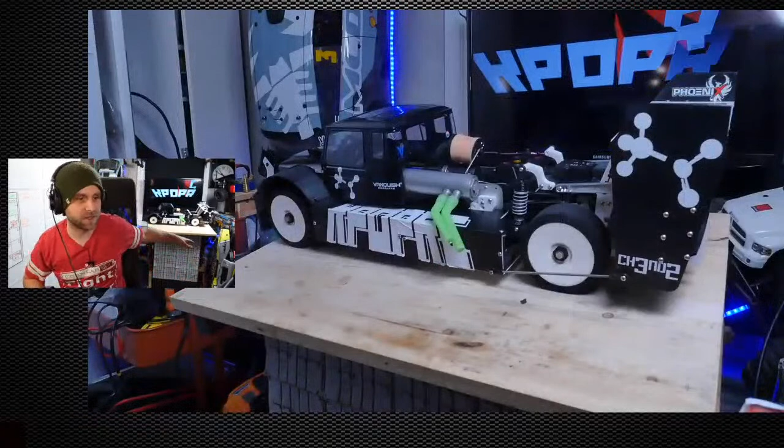We got the Mayhem build here in the background, engineless right now. It's kind of on the back burner because we got a whole bunch of snow, which kind of blows. We're kind of waiting for it to melt so we can run the Baja. The Baja, you can kind of see it right there, sitting right there, kind of awesome.

Maybe if I zoom out a little bit - oh boy, yeah you can see. Oh no, you can't see because the giant camera's in the way. Doesn't matter, we're running those hopefully this weekend. I'm not 100% sure, I'm waiting for Scale Builders Guild to let me know when is a good time.

And we're hoping that it's going to be a bit warmer. Maybe a tad lower for when you get excited. Okay yeah, and I'm gonna get excited a lot because I've got a problem with that - I had a little problem with that. Okay, we got a little lower there, okay great. A bit too low now, they're saying. Ooh okay, maybe we'll balance it out, bounce it out a little bit. I'll bring it back up, but just a hair, just a freaking hair.

Just don't yell, everyone's saying. Oh no, that means it's weirdly distorting. It shouldn't be doing that. Let me check something here - I think I can go into audio, echo, and then automatically adjust mic volume. That might make it better. I have a feeling that's going to help.

I'm using this thing called StreamYard. It's like a web portal that lets me webcam in and do stuff like this, like bring up Scott Diesel's question. What's up, Scott Diesel? Hope you're having a good Tuesday. And PSP Radar 77. I feel like that's the benefit of this software, is just so I can show people. There is a way to do this in OBS, but at least you sound better than Josh. No way, really? No way.

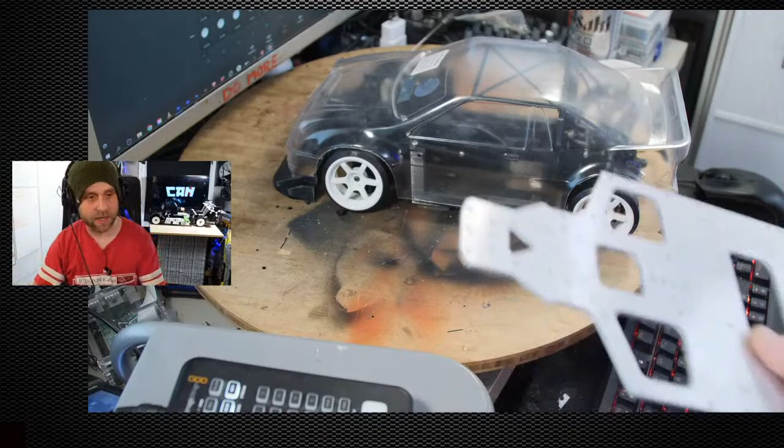Anyway, fast forward a few weeks, and I got the chassis cut out of aluminum from Send Cut Send. A massive shout out goes to Gear Guy for helping me with this file, because SketchUp sucks so hard - it sucks so hard that I couldn't get a good DXF file out of it to send. So he had to convert an STL for me, and it was kind of a big pain in the ass. But it's here.

It looks great. It's pretty much exactly the same as what's on the back here. Let's see - actually, maybe we'll go to camera 3. Yeah, there we go, now you can see. It's the exact same chassis plate, but in aluminum.

I would have cut it in carbon fiber, but believe it or not, to cut this out of carbon fiber at Send Cut Send, it's like $200 or something ridiculous. So I just thought - since I don't even know if this is exactly right, things might change - at least this only cost $28 to get cut. And if I have to make another one, it's not gonna hurt my wallet. Whereas the carbon fiber one would just be something to hang on the wall. Let's see what you dudes are saying up here.

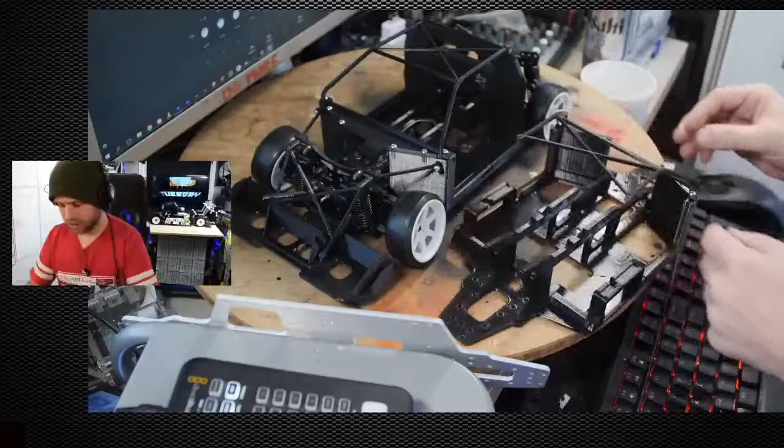I believe, yeah I did, but I kind of broke it, of course, just because I'm a dummy. I totally probably stepped on it or sat on it at some point, and I broke the cage. But that's okay, I can always print this cage again, and I will.

Actually, I'm thinking of maybe making this angle here - the A-pillar - needs to be kind of a little bit more that way. I think it needs to fill out the body, the Lexan body, a little bit better. But yeah, that's basically the gist.

I also kind of totally redesigned the firewall. So this is the firewall here, you can see it, it's pretty cool. I kind of like the texture that the Prusa textured sheet gives certain pieces of the side that's against the printing surface - gets this really awesome textured finish that looks kind of awesome, almost like a bed liner kind of look.

So I've been designing a lot of my stuff flat, so that I can print using the FDM printer. I feel like that is the biggest learning curve when you're learning new 3D printing processes - you're trying to design for the limitations of printing. So this is how I do it with FDM, but then to do it with resin, it's like a whole other thing.

Like for resin, if you're gonna print something like this, you gotta put it on the printing surface at quite a steep angle so it doesn't create suction. Man, all these weird things with resin - just the differences, I guess, between the 3D printing processes.

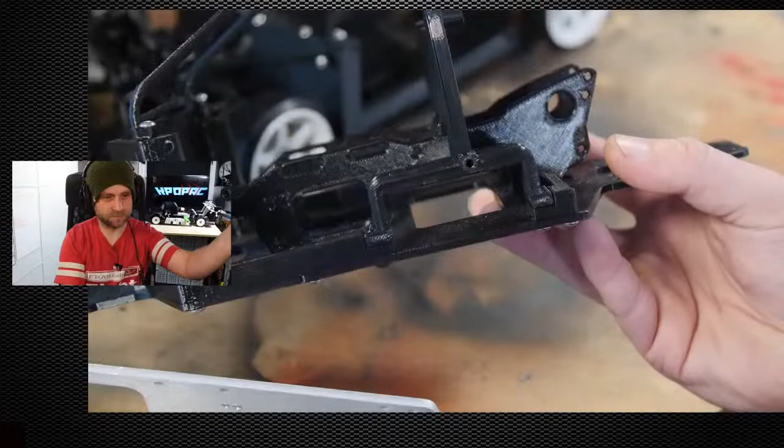So that's it, it's got a whole new battery provision. It's just a whole different way that the battery goes in. You can see I had to move the firewall super far forward, so I basically created this hole, and the hole exists on both sides.

And what's going to happen is when you slide your battery in, it's going to click - it's going to move past something that clicks. I don't know, it should be cool, we'll see what happens. I might have to redesign it, I won't be surprised if I have to redesign it.

But let's get - yeah wait, is this it? Yeah, you just need to zoom out and you need to freaking focus.

Man, more beer. All right, wicked. I'm gonna move this out of the way because we don't need it right this second. So I'm gonna get this whole cage onto this aluminum chassis - is the plan, that's the plan.

Let's do it. And of course, I'm going to use this, so we're going to hear a lot of...

It's not dead. No, it's not dead at all. I got to get rid of all of those. Look at that.

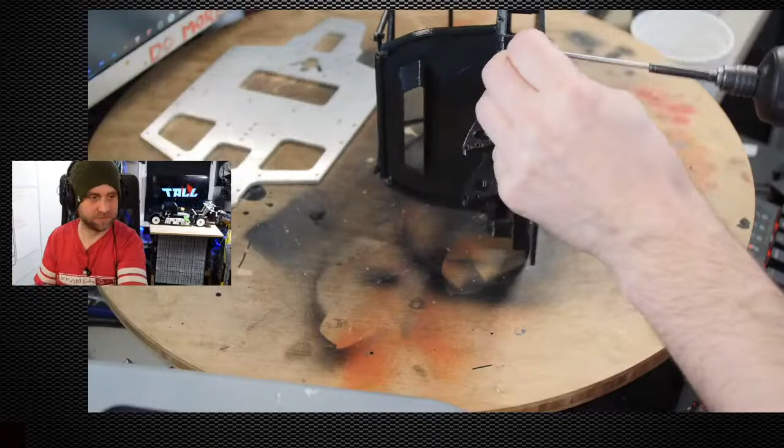Yeah, let's just zip them out. Let's just zip them out. Oh yeah, one.

This is the glamorous part of RC right here, where it just takes forever to screw stuff in, or you do it wrong and then you got to redo everything. Good Lord, it's the worst.

Anyway, I'm kind of surprised how well this turned out, to be honest. This is probably my most intense 3D design project when it comes to RC. I don't have SketchUp open. Let me open SketchUp and we will take a look.

Let's see here. 6. No, all right, okay. Share screen. No audio. Boom, share screen. Got it. All right, boom.

Let's see here. Well, I'm trying to use this awesome mouse that Paula got me for my birthday. Yeah, there we go. All right.

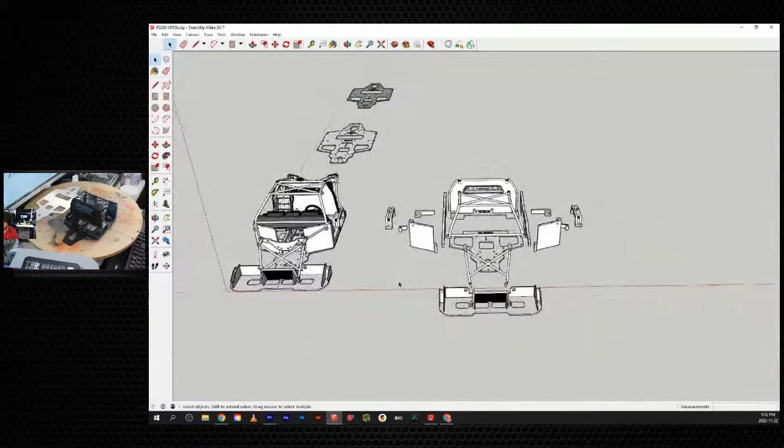It's hard because the mouse is really hard to learn, and I would kind of compare it to flying a drone, where you're in control of multiple axes, and then a rotation on one of those axes. So yeah, it's just hard to wrap your head around a control surface, one input, one hand that can move in so many different directions.

But you can kind of park it and then just do these long, slow pans. Anyway, whatever, I'm getting ahead of myself. This is it in 3D here.

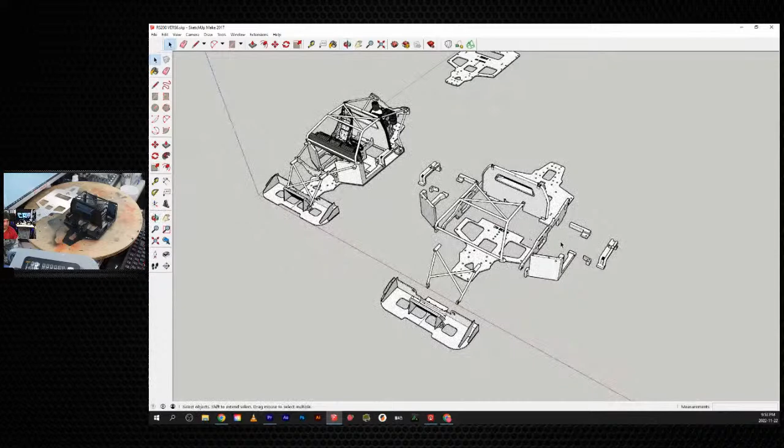So these are all the parts that I'm basically taking off the plastic chassis right now, because I no longer have to have this in 2 parts since I have the aluminum one all ready to go. So let's hope this all fits, because it's going to be really damn embarrassing if this doesn't fit the aluminum plate.

If it doesn't fit, I'm just going to hang it on my wall, I think. Is what's going to happen. Yeah, I know, totally, right?

Hope that battery's charged. Which battery? What are you guys talking about? Let me drink some more beer. Oh, delicious beer. Okay, let's keep going.

Let's keep going. I just got to pull out all these screws, basically, is what I got to do. And you can't see anything. You know what I'm saying?

All right, okay, we're doing it. We're doing it. There's, okay, so yeah, there's the cage, the top cage piece.

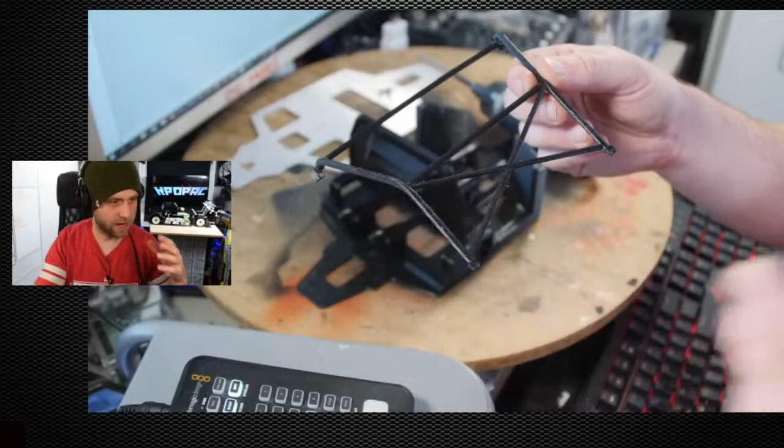I learned a lot from the Hilux build. If you guys don't know what I'm talking about, we made a Hilux, fully tubed Hilux drift chassis. Scale Addiction and I did. And when we designed the whole cage, we didn't think really about the printing and how much support material would be needed to print the cages. So, oh, maybe I can show you dudes.

Yeah, all my camping gear is in here though. Yeah, okay, perfect. This is great. I can show you dudes.

So we designed a cage, a Hilux cage. It's a replica of the Engineered to Slide Drift Hilux from Australia. It's like the sickest Hilux. It's slammed, completely tubed, basically just a thin sheet metal body on top of a full cage.

Anyway, when I print those cages, because I was printing them and doing raffles, this is how I would print them. So this is the center section, 2 center sections of the cage. And you can see they are just full of support structure. This is all garbage, all wasted materials.

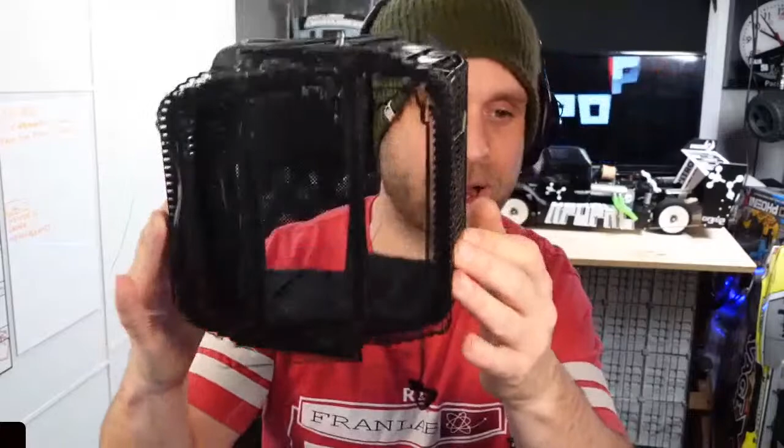Also when you do this, it ends up taking an incredible amount of time to print, and the failure rate is high. All of a sudden you get a weird draft in your room, or you open the window, whatever happens, something's going to happen. Some weirdness is going to happen and you're going to fail a print. Then this 14-hour-long print becomes totally garbage, right?

You can see, as you can tell, I have 2 Hilux cages all ready and printed. Not ready, but ready to be... what is this called?

Supports are a huge pain to remove with PETG because it's quite a strong piece of plastic. So now I'm designing the cage in parts, so it prints flatter and I can put the support structures on the inside where people won't see them as much. Mind the broken part here, I must have stepped on it. Doesn't matter, I'll reprint this anyway since I'm changing the structure.

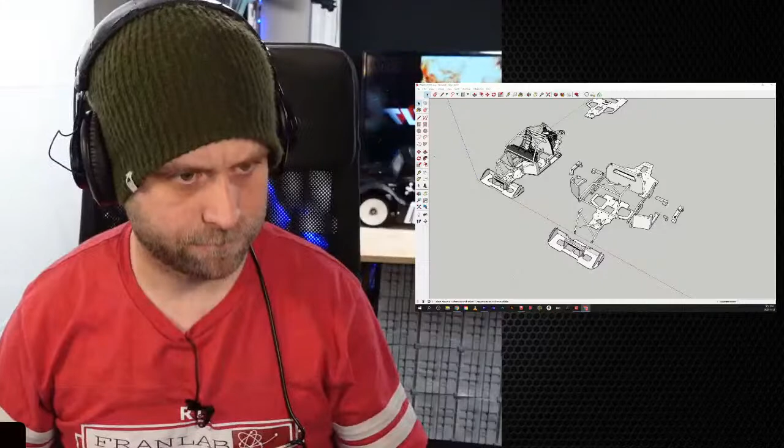So you can see I'm trying to separate the cage into all these little chunks. We've got the one you just saw, the main hoop which is another part, and then the back sections as well. These back sections will actually have a cross section on them, like cross pipes. Everything's going to be printed quickly and hopefully with less support structure, that's what I'm trying to get at.

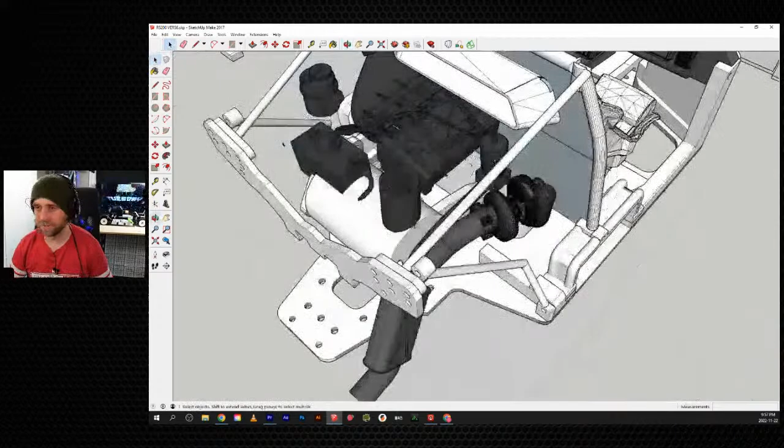You can see the 4-banger right there with the giant turbo, the exhaust I made. I didn't go too crazy, I kind of thought of making it like a super late 80s race car, like pure race car. I love this exhaust man, this exhaust is pure fire.

What are you dudes saying? Everyone's telling me to drink. What's up Goat, hope you're having a good Tuesday. Nash, no, I got an extra battery though. Everyone's telling me to drink more beers. Damn, it's because you get me focused and I start getting all boring. It does look awesome though, I'm totally into it. What's up MK6, hope you're having a good Tuesday.

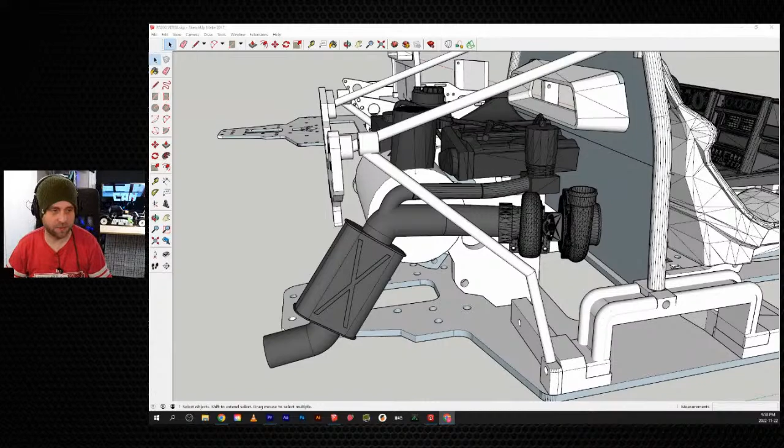We're just talking about the RS200 project, and I'm trying to actually get things done on this episode of Tall Can Tuesday. Not only just crush beers, but I'm trying to basically -- alright, let's focus so you guys can see what I'm doing here.

Maybe I shouldn't have done it in black. Next time I do something like this, I'm going to print it out of white because the black makes it kind of hard to see anything. I'm going to need that in a second, I put it down on the ground over there. Alright, let's keep going.

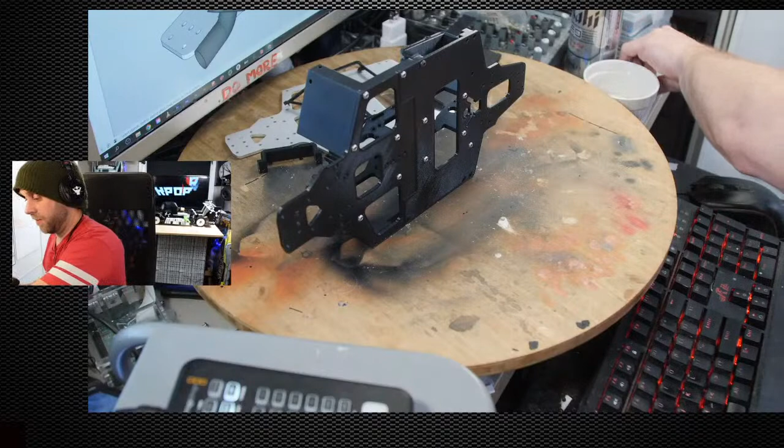I didn't even get it, I don't think you guys can see what I'm doing because my hand's in the way. Here, now you can see. So many screws, this is what happens when you're not an engineer, or maybe just starting out as an engineer where you over-engineer everything to the point where the screws in this kit are going to be heavier than a lot of the other components. The screws alone are going to be quite a lot of grams, I bet.

This is what it's going to be, it's going to be tons of this. Alright, we got parts, parts are flying off.

I should have got a guest, what was I thinking? We could have been chatting. Nash, you want to pop on?

So many screws. Wait, we could do this, and zoom in a bit. There we go. Is this camera still dark? I can't even tell anymore.

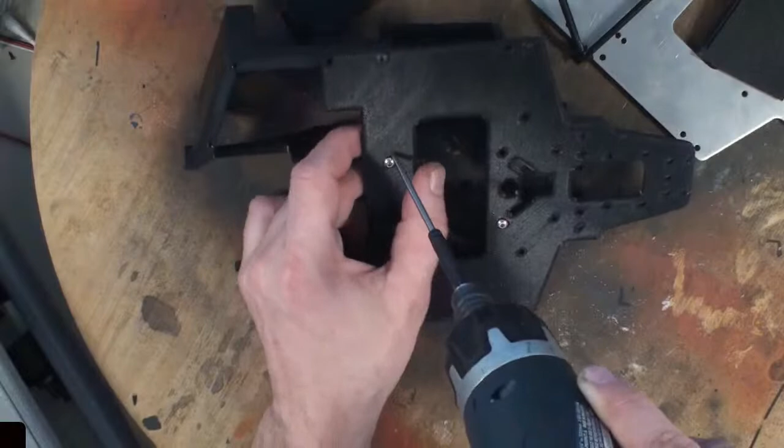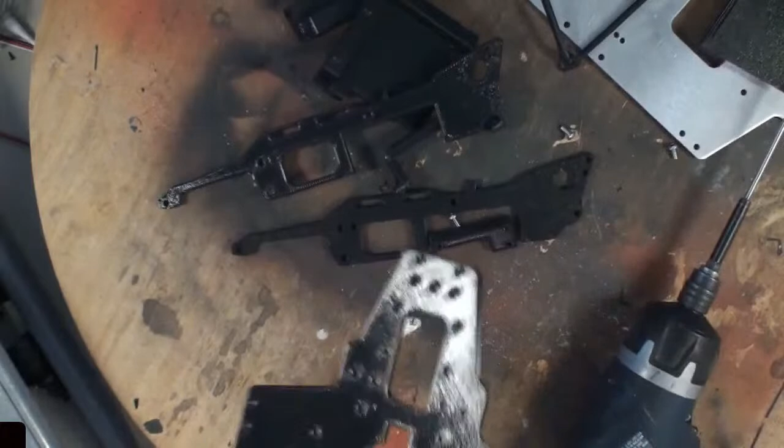I feel like if I had three more beers I wouldn't be able to do any of this, so maybe it's good we started early, you know what I mean? Started early.

Alright, I'm going to move all this stuff off. Alright, boom, alright.

Is it bad I can't talk and occupy my brain with other things at the same time? Is that a learning disability? I don't know, God, maybe. Let's see here, oh, it's already past Nash's bedtime. Damn it. Alright, Dean, what's up buddy. I know, Boo? Wait what? Oh, Boo is like Nash's bedtime, got you.

Alright, so we got this awesome, beautiful water jet cut piece of aluminum from SendCutSend. It is a little bit thicker than most RC plastic reinforced materials, like the stuff you'd get for cheap RC cars like the Sakura.

It's a lot thinner than this. This is quite a thick piece of aluminum, and it is quite weighty. It doesn't weigh nothing, that's for sure. It definitely feels like it's got some weight to it.

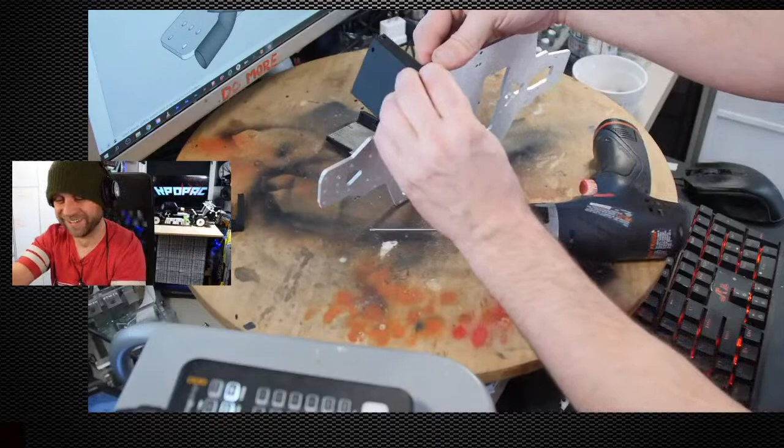For sure, let's do this. I feel like from above it's easier to see what I'm doing.

You know, I'll tell you what, I really like PETG. I like PETG because when you screw into it, especially with a tool like this, it actually heats the screw up quite a bit. And if you end up going past and stripping out the screw, the heat will actually melt the plastic enough where once it cools, it will still create the thread. So believe it or not, if you get this thing hot enough, you can remake the threads in the material, which is kind of awesome.

Ask me how I know that. It's happened a lot. I've been screwing a lot of 3D printed pieces together lately, and I haven't been using any inserts. You can get these copper inserts, and some guys actually pause the 3D print and insert brass threaded inserts into the print as it's printing. Then it prints the layers on top, and seats them into the plastic. I mean, that might be kind of a mistake with RC if you're taking screws in and out - you might end up stripping the brass insert inside the 3D print and it would just spin, and that could be a nightmare. I could see that being a nightmare, but it's super cool that people are doing that.

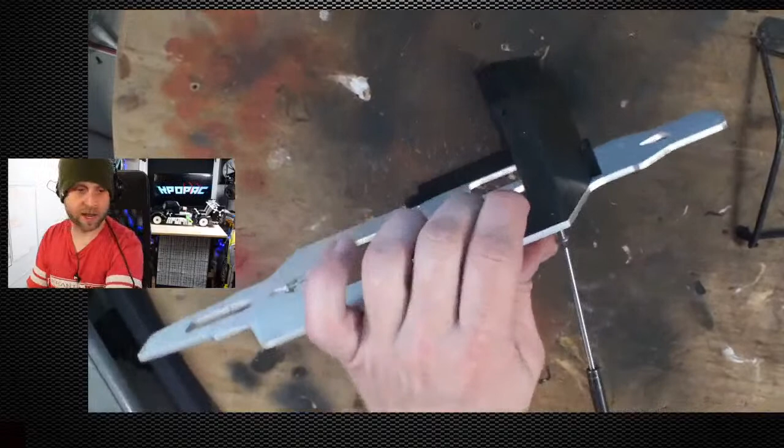I know you guys do similar things and make your own cool RC stuff, even if it's not 3D printed. It doesn't have to be. I feel like that's why I got into RC, to be a mini engineer, to make things and figure out, learn from doing as well. Not like an RTR guy, I'm not the kind of guy that would buy an RTR. Let me know in the comments how many of you dudes have owned RTRs. I think I've had maybe 4 RTRs, and all the other ones were kits. I prefer kits, I feel like you learn a lot about the model when you build it. Whether that's making a ton of mistakes while you build it, that's a possibility too. But I'm thinking more like, once you put it together and break it, you can at least put it back together with new fresh parts, and you'll know what you're doing.

Anyway, oh, that's actually kind of badass, check this out. All right man, this camera's kind of foggy, I don't know why. I feel like maybe the exposure's a bit crunchy.

Oh, let's see here. Steve-O, what's up buddy? Hope you're having a good Tuesday, man. It's telling me to drink some beer, so I will. Oh, that delicious beer.

I build one-of-a-kind drones, yeah you do man. Dude, let me know, I want to get into it. I really want to learn how to properly pilot racing drones, not like a DJI stabilized camera drone. You're actually going to crash the thing if you don't wobble it into place, if that makes any sense. I do have a couple of digital versions, like I know that Mr. Steele has this one app that he swears by, and he has a couple of videos on how to set it up to make it feel more like the real world. It's like a digital version of FPV flying. I think I'm going to keep playing with that until I feel really comfortable before I go into real world FPV drone stuff.

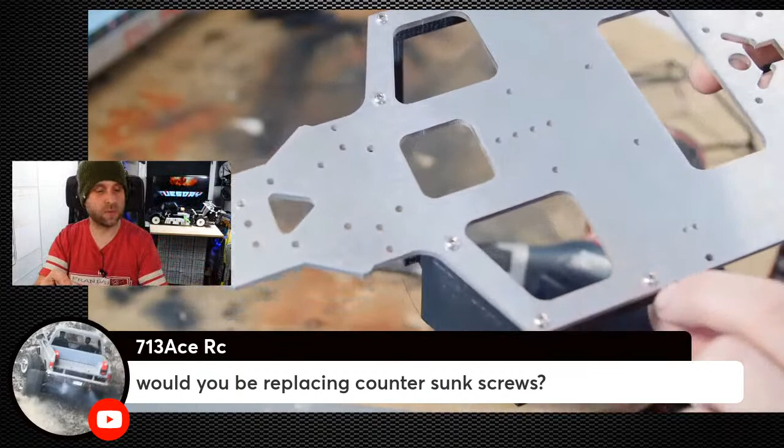Would you be replacing countersunk screws? No, I don't know, I mean, yeah for this project probably not. 713Ace Rc, I think we're just gonna use button screws. Is that weird of me to do that? I don't know, the thing is at the time they wouldn't do the countersinking. When I ordered this, they didn't offer countersinking yet, but I know they do now, so maybe that would actually be really awesome to do countersunk. I'm just trying to keep up, I feel like it's gonna be like this. Unfortunately we're not gonna have the countersunk screws on this particular model, but that's okay. You know what you could do, you could get titanium screws and slam it, and it'll just spark. I don't know, that'd be pretty cool. All right, let's keep moving.

We got more stuff to screw in here, let's start with these. So these are the new chassis, horizontal chassis braces, I guess the vertical stabilizing chassis braces, and those long screw holes there, that's just so I can slide the seats forward and back so you can plug the battery in, because the battery slides into this hole here, and then you've got these two banana leads, 5 mil banana plugs. So you got to move the seat out of the way in order to. Wait, I guess I can show you in 3D. So here you can see, this seat will actually be able to move forward, so that's where it would sit.

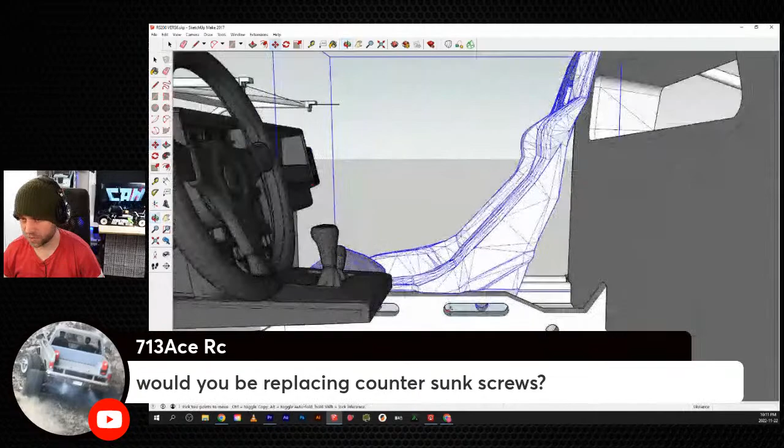Oh wait, maybe not, because you can see it's right into the firewall. So that's good to know that we can't have it. I should probably make these holes smaller because the firewall is going to stop the seat from going any further back. Maybe we should figure that out.

This whole back end got changed, and of course I didn't fix the seat rails. That's okay, I'll make that happen on the next revision. The next revision, damn, so many revisions. But yeah, super cool, this thing's cool.

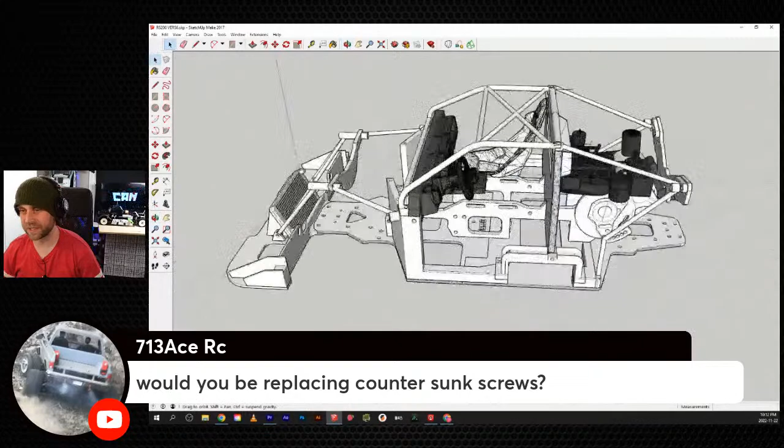Check it out, I can put the cage back right on this corner. Boom, there we go. Yeah, I think it's going to be probably the best looking scale drift project that I've ever completed.

So I'm looking forward to it. And to be honest, I'm looking for more bodies, but it's hard to find these ones because I want to buy like 4 more of these bodies. This particular one is made by a company called Archon, and I think I originally bought it from Amazon, and the seller doesn't have any more. Now I'm just looking for more with the perfect wheelbase. I already bought one that ended up being true 10 scale, so that sucks. Now I have a 10 scale version of this that I don't know what I'm gonna do with, but I guess it'll just go into the collection of Lexan bodies that I'd never paint. Jeez, I have a lot of those.

What's going down? Anyway, how awesome is that? Super, super cool.

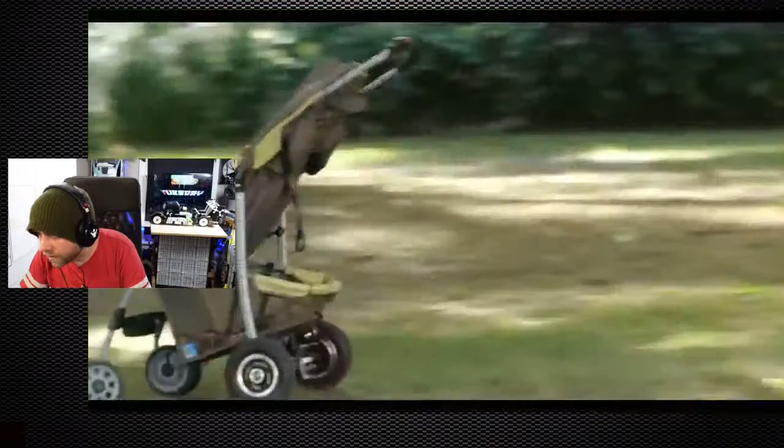Wait, haha, all right, let's see if this, hopefully it's not too loud. This might be too loud, I'm going to turn it down a lot. That's me decided. Ooh, I can't even hear it, it's so quiet, for me, not for you guys.

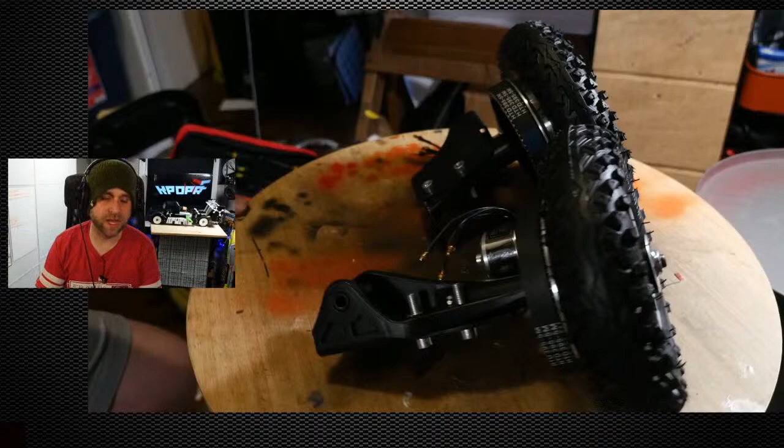Into insanity, the stroller. I'm just going to turn it down so you can just hear me. We took these skateboard wheels, skateboard trucks built for super low kV, high voltage motors, and I modified the motor bracket to take an outrunner motor. We've gone through one set of outrunners already. The first set was 780 kV, which was still too high because our gear reduction on those motors was 5-to-1 - the motor would turn 5 rotations and the wheel would turn 1. So with the wheels being that large, it needed quite a bit of torque to get going.

So we ended up replacing the outrunners with 320 kV motors, and those freaking motors, that thing will start and go, no problem. Let's see here, let's get to the good stuff.

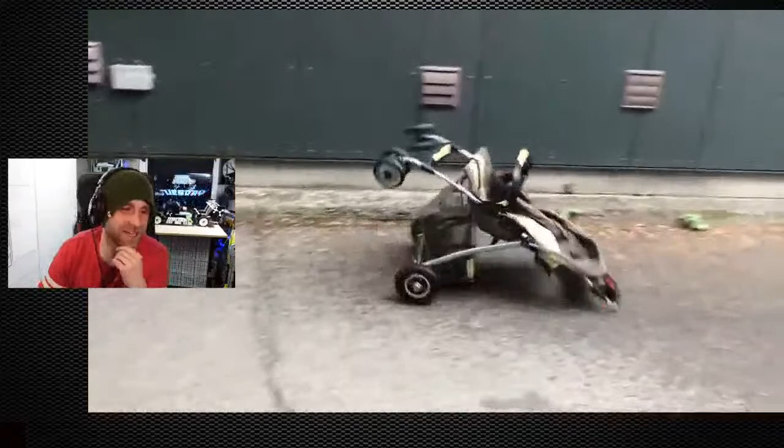Oh yeah, this is the maiden run with Nash. Nash and I got together to shoot this thing, and this is the first time we ran it. We realized very quickly that any kind of power on the wheels is going to tip this thing over. It's meant to fit in the trunk of a car, so it folds, there's a folding point, and that creates this awful center of gravity.

So of course I went and got a brick, and we zip tied a brick to the front of this thing, and it was really funny. Maybe we can hear what we're talking about, because this is the funniest part of this whole time.

Oh man, sweet, all right, so I got zip ties. Should I go get a brick? Oh, I thought they were heavier. They're not heavy bricks, man. Maybe we zip tie the batteries to the front, and then zip tie the brick. Oh, look, it's not that heavy, eh? That way it looks like a brick. Maybe we should have done it underneath. Oh, like underneath, oh no, you're right, under.

So these are the super high kV motors. That's more controllable, eh?

Stop. Okay, it's working. Oh wait, hold on. Let me pause this for a second.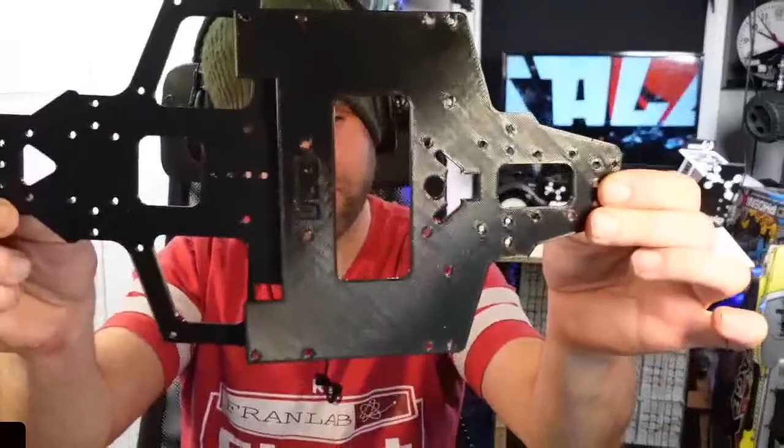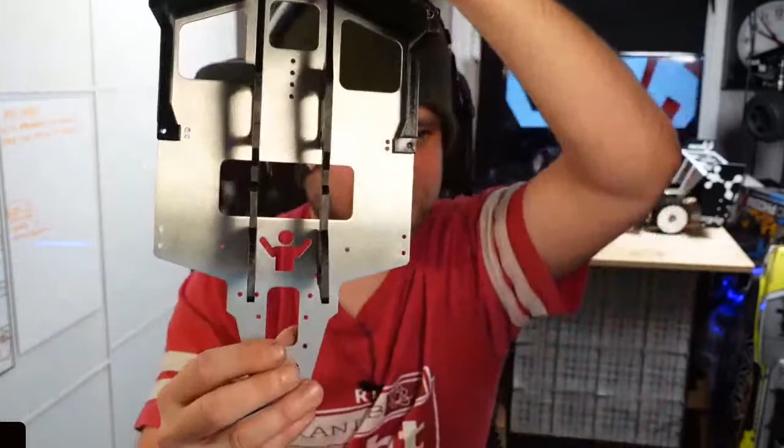I didn't really make it, it's piggybacking off of another chassis. But what's cool is that the whole chassis couldn't fit on the printing surface, so I had to split it into two pieces. The design of all the pieces kind of fit together and support the fact that this is two pieces. So really I should redesign everything to not have to be split. The reason these are split, or the reason there's extra screws here, this one and that one, is because there used to be a giant crack - this used to be 2 parts. Also, it's kind of cool, I put my logo there. That's pretty fire. Damn, so highly recommend sending stuff out to Send Cut Send and getting stuff made out of straight up aluminum. The coolest, man.

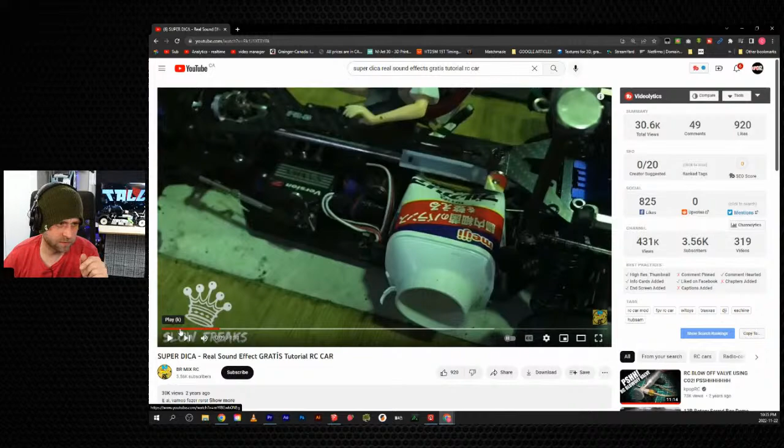Yeah, see, that's the sound, man. That's the freaking sound, and look what it is - it's like a yogurt container. And then what he did was he machined a square kind of collar that slips over his solid rear wheel axle. You can see there, looks like a front engine design chassis. I'm not sure what chassis it is, I don't know that, I'm not an encyclopedia on it by any means.

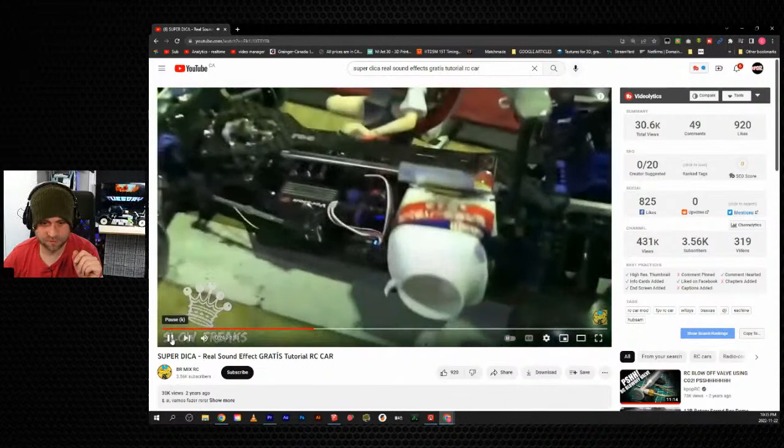Yeah, if you guys haven't seen this, man, wow. I like how he's with the throttle, making it sound like that, and you know he's doing that with his finger.

Anyway, it's super sick. Massive props goes out to these guys for making that.

It's pretty sweet. Jipper, man, what's up buddy? Hope you're having a wicked Tuesday.

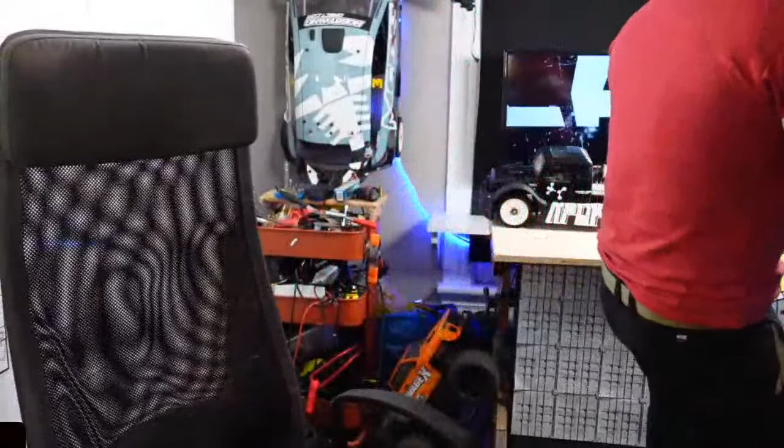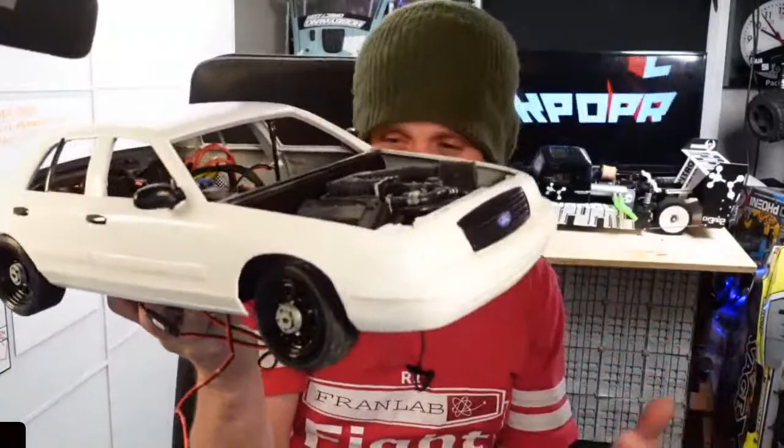Oh, I don't want to break them though. Could you imagine if you broke them? I have this nightmare that I'm just gonna one day break this thing before I can finish it, and then I'm gonna cry because it's the coolest thing, it's another one of the coolest things I've built on the channel. If you guys haven't been watching along, there's like a 10-part series on building this Neighbor.

Yeah, drift, I would call it a drift car, but it's more of a burnout car. The reason it's a burnout car, check it out: you can pop off the back, slip out the front. There you go, and now we've just got the chassis.

You can see here, this is the largest BEC that Castle Creations offers, a 10 amp Castle Creations BEC. The reason I need one is because there are 4 servos. You can kind of see there's one servo, there's the other servo, and then on the back there are 2 more servos, and that controls a super scale 2020 active suspension kit.

And what that does is it creates this very swimmy... haha, why not show you dudes, because this is the coolest. Just let it calibrate for a second. I'm gonna pick it up so you can see the wheels dance around, and then we'll put it down on the Lazy Susan over here and check it out. Oh, it's working, I can hear it. Hold on.

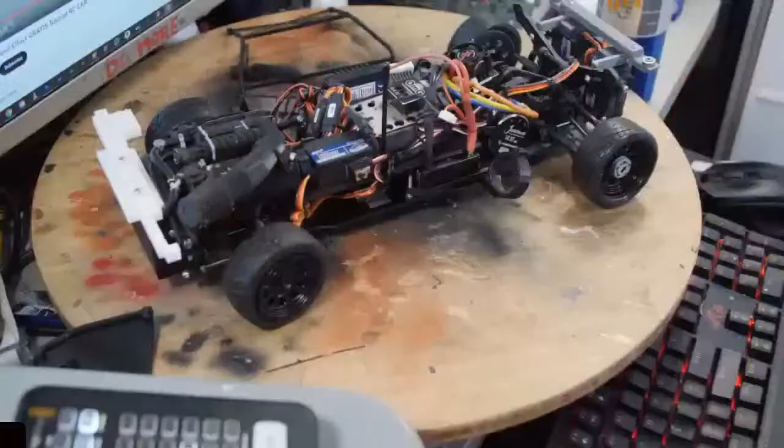Anyway, it's sick. So what was I talking about? I was talking about how it's a D4 chassis, so it used to be 4-wheel drive, but what I did with the front diff was I created a line lock. So this servo on top actually stops the front wheels from spinning. If we were to turn this servo back a little bit, we can actually lock the wheels. And it's hard to do with your fingers, so maybe I'll just leave it for now.

Make it dance, Jibbersane. Yeah, I know, Scott Diesel, I watched the video. Scott Diesel is saying Cleetus wrecked it again. Yeah, I totally saw that. Man, I wonder if it's long for this world.

I'm definitely gonna make it, because I should, with the back bumper. Hey, I wonder, do you think—I don't want to lean on freaking Cleetus McFarland by any means, but it would be cool to sell this bumper, even if it's just like an ornament you hang on your rear view mirror or something. That would be a really obscure Cleetus fan memorabilia thing, I think. No, that would be really cool.

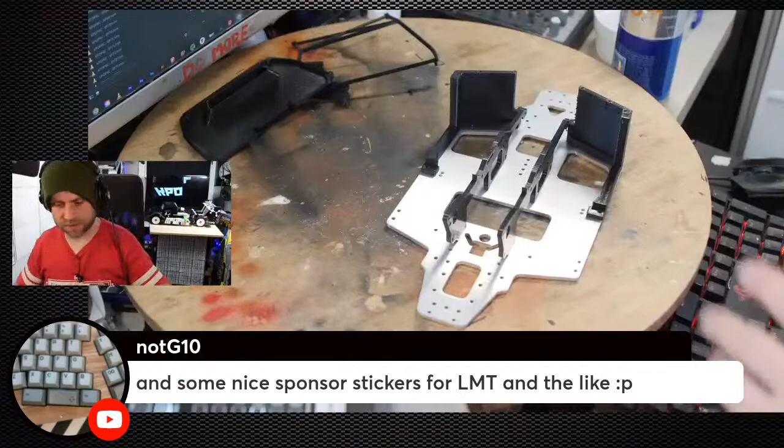That sounds cool. All right, let's keep moving on this thing, because I feel like I'm going to lose all the parts, that's what's going to happen. Let's see here, we got, oh yeah, okay. So I can't remember, oh yeah, okay, so these go like this and like this.

See, I wonder if I could have. The reason I made these into 3 parts is because I didn't want to. The trick with FDM printing is to design everything so you don't have to use supports. So if you were to look at this particular part right here...

I printed it like this so that I didn't have to use any supports. Although that was kind of a dumb move, because if you look - oh God, get back in the camera - I printed it like that. I probably should have printed it like this. I think I designed it to print like that, but I was a dummy and must have put it in the wrong orientation on my slicing software.

But yeah, so that was the whole point, was to design all this stuff so that you had no supports. The supports are the devil. They work, but because it's such a thin extrusion, and it's one line extrusion most of the time, what ends up happening is you get weird little blobs of plastic on your print head. Those blobs become fairly large over time, and then get left there, and the next time the print head comes over it runs over it and you get a hop - this weird hop over it - and it can do weird things. It can sometimes pull the whole support or rib off, or it can just split it. It can just do really, really random stuff. So if you can avoid using supports, definitely avoid supports for sure.

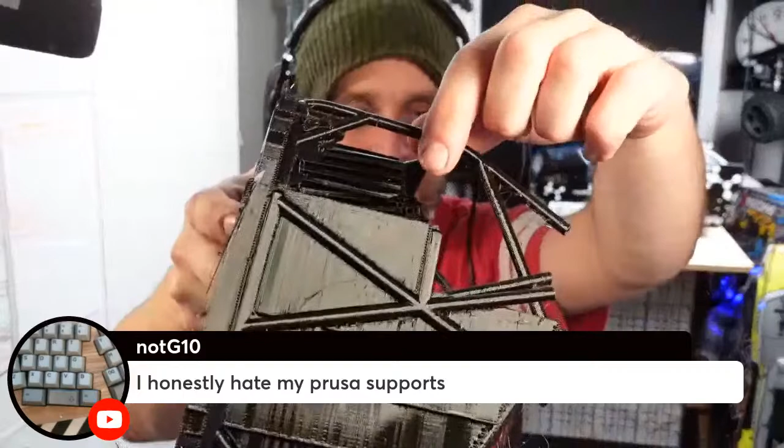You know how crappy this is. I guess it's not that bad. I guess it's not that bad. Oh yeah, it is, it's that bad. Check it out, look. Well, there you go, that's a waste. Massive waste. Support structures. Well, that's too bad.

What can you do? It's happened before. It's gonna happen again, for sure. I think so. Yeah, wait, hold on - what were you saying? Whatever happened to the RB?

Oh okay, so Space Panda - there's some weird stuff with the RWB. The problem with the RWB is that it's like a promotional thing for Cardinal Racing, and it's supposed to promote the chassis it's based on, the Yankee chassis. The problem is he doesn't have a lot of those chassis, so right now it's a little bit on the back burner until either Cardinal gets more chassis to sell, which might happen.

Yeah, or we just go rogue and just hit it. I have the engine for it, it's kind of ready to go, and it is build season, so I'm thinking we should probably get back to RWB. I should probably find somebody who is better at painting than me to do the Porsche livery on there.

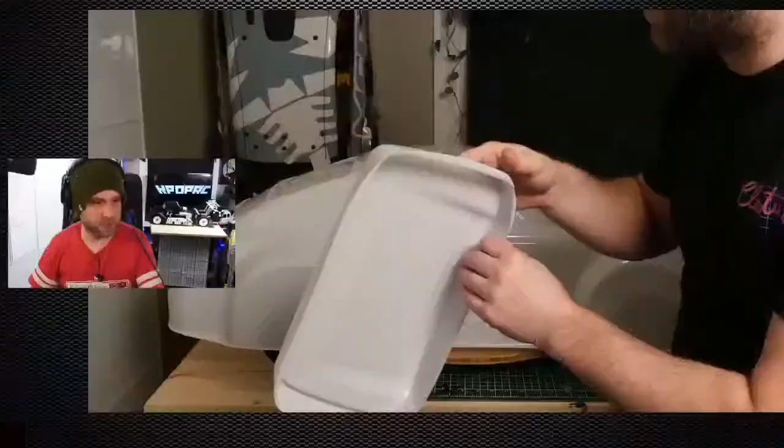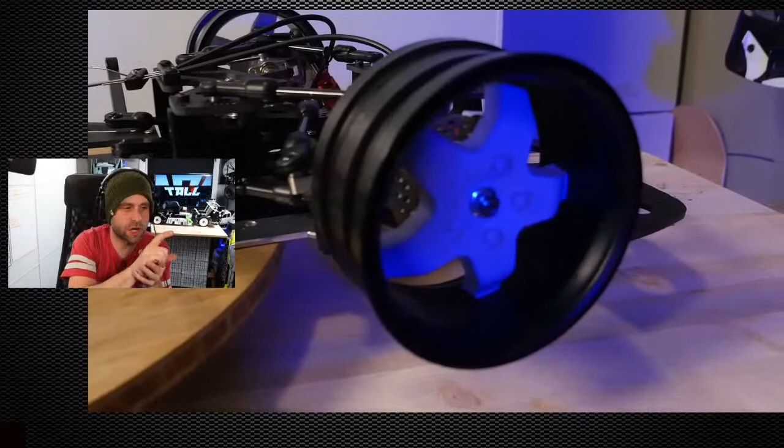Anyway, I was going to show you guys the Porsche, because the size of this thing is pretty nutty. I was looking at cool Porsches. Anyway, this is the chassis here, so this is what this would be going into. It was hard to lift, I thought it was going to be as heavy as a tall can, but it's heavier, like a pan chassis. It's a very classical pan chassis design, using basically leaf springs in the front. It does have a shock that dampens, but it doesn't have a spring on the front, it's using some kind of leaf spring system in the front. Those are FG front disc brakes. We're going to line lock the front so that on 12S we can do a pretty nice healthy burnout, I think that would be really cool. Look at this thing, it's freaking crazy, it looks so cool.

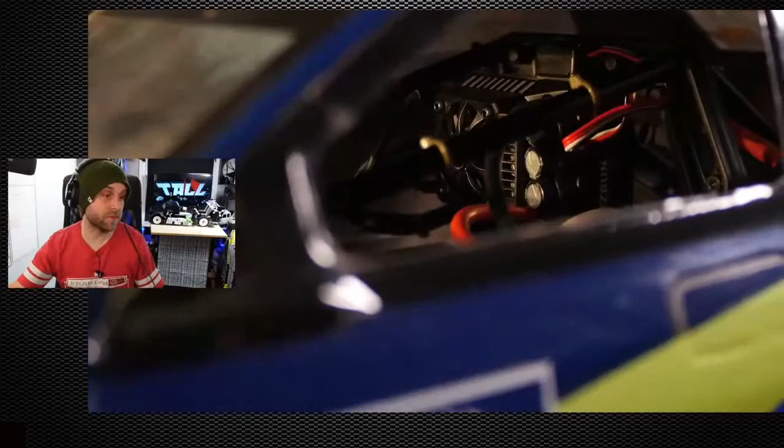Anyway, so Yankee, this is the company that makes it. Visit Cardinal Racing, if you visit cardinalracing.com you can email him and ask if these guys are coming. He's the owner of this vintage MCD bug-eye Subaru that everybody always asks about. Whenever somebody sees this in my videos, they're always like, where can I buy this fifth scale car? And you can't, man. This thing was last produced in maybe 1999, maybe 2000. Apparently they lost the molds, I don't know if that's a rumor, but they lost the molds, and I don't think they were licensed molds to begin with, so maybe that was like a cease and desist thing. Not 100% sure. I wonder how many car companies send cease and desists to companies that make replica models of their cars.

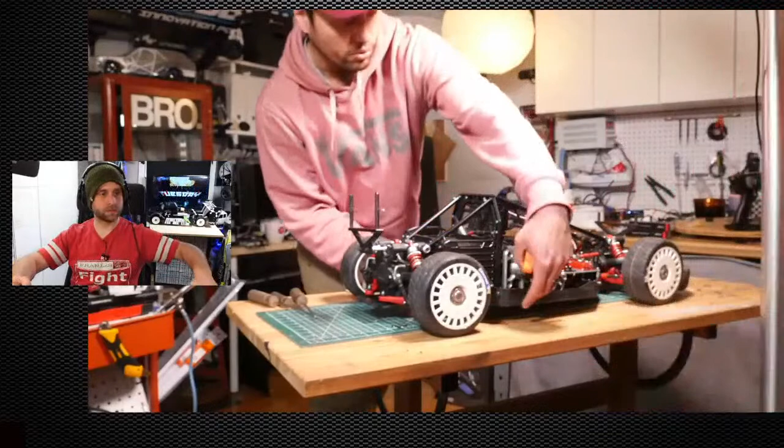Yeah, here you go, here's the episode. It is 100% the most perfectly proportioned, just Lexan bug eye body ever. And the reason I say that is because the coolest thing about the bug eyes and that generation of cars is that when you're driving, you can put your arm on the door sill when you open the window, and you don't have to do this like with the new cars—it's comfortable. It's the same thing with E30s. E30s I feel like are lower, side impact ratings terrible, but for driving experience, there's something about putting your arm on the door, you know, and that's how you can tell.

The HPI, I mean I love HPI, don't get me wrong, but HPI's Nitro and electric, the WR8 or whatever version of this bug eye, proportions are all incorrect. They basically stretched that Lexan body until it fit the wheelbase of the car, not the other way around, which obviously is, to me, no bueno, man. That's why Kyosho is so good—if you buy any Kyosho 8-scale Nitro or touring car, they're like the most perfectly proportioned RC cars ever made. Man, good Lord.

Yeah, but sick, eh? Yeah. Team Associated. All right, let's give that a Google real quick.

Associated RC. Ah, okay, got it, I'm looking for the cars though. News, I guess it would be on news. Oh, are you talking about the unicorn reflex? Oh no, I found it, yeah I did see it. Weird, okay hold on, we're gonna turn off my Premiere for a second. Oh my God, I didn't do it. No, I did it, then we're gonna share screen. Check it out, okay so this is it here. Oh man, my bookmarks, that's annoying. Okay, oh what have I done? Let me just quickly remove my bookmarks. You don't have to see that I invest in stocks and stuff, terribly, but whatever, we're good, we're working it out, learning. Anyway, this is the new—

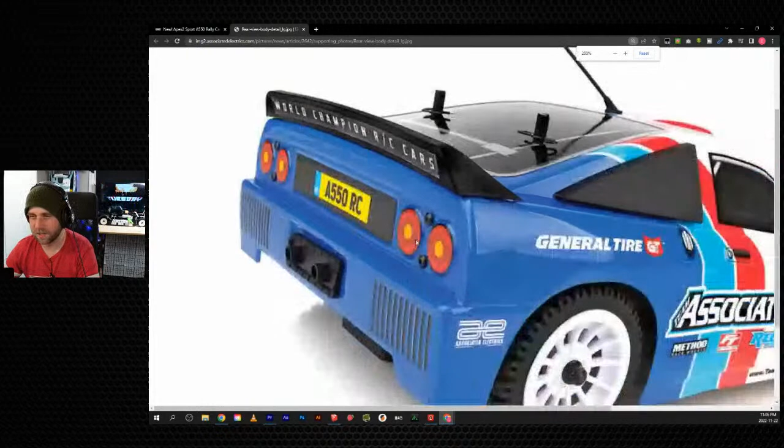Associated apparently came out with a new kind of rally Group B inspired car. It doesn't look like they got a license for any of the real brands though, that's too bad guys. What the hell is that supposed to be? Open image in a new tab—is it a big image? Oh yeah, okay, that's pretty good. I mean, I guess they're trying to make it look kind of like an Audi, a little bit, I guess. Man, I feel like I got my finger on the pulse—I've been buying Group B rally 10-scale bodies for the last like 6 months.

I've been looking—ooh, these rims are sick though, and the tires are sick too. Yeah look at those, that's pretty sick. I mean it looks cool, it has that Lancia vibe for sure, right? Got the Lancia vibe. Would you be able to do—let's see here, yeah.

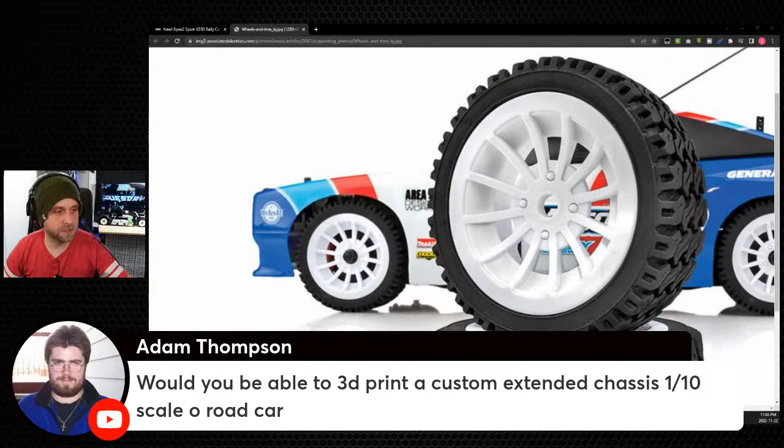No, Adam, I wouldn't be able to do that. My recommendation to you though, Adam, is to just go to Creality.com, pick yourself up a 3D printer for under $200, $230 US dollars or whatever, and start your road to learning how to make cool stuff. That way, what you would have to pay me to do it—which I wouldn't do anyway, because I just don't do that. But you know what you could do if you don't want to do all that stuff: you can join a bunch of 3D printing Facebook groups, and there you can ask people to do stuff for you, and they'll give you a quote and you pay them. But just a heads up, you might end up paying close to the cost of a 3D printer, because 3D printers are fairly cheap nowadays.

Right? Alpine 50, okay got you. Alpina, okay yeah, I see what you're saying. Yeah.

Oh yeah, the Jipper, I don't know. Let's build one and they will come, right? Maybe that's something I should talk to Scale Builders Guild about. Maybe we should be starting more community involvement. I know it's local, but we're pretty close to Niagara Falls, so maybe we can do something close to Niagara Falls so people can come up from Buffalo, New York, or move around a little. We're also kind of close to Lake Erie, which is fairly close to Ohio-ish. Pennsylvania's right there, Ohio and New York State. I'm just north of that basically.

Let's see here, I use Kyosho Fazer MK2.

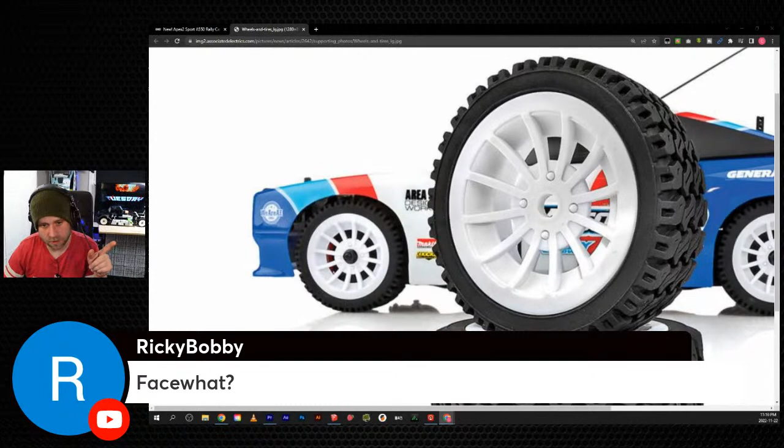What do I do with my hands? Yeah, you don't have to use Facebook. You can jump back 10 years and go to forums. There's forums online, you can join a 3D printing forum, you can actually jump on the Prusa forums as well. There's a whole community there that's just related to 3D printing. You don't have to use Crackbook or whatever. Yeah, no, I'm with you Ricky Bobby, don't. And if you're on Facebook, don't use it on your phone, only use it on your computer. And if you use Chrome, which some people don't even use, there's a Chrome plugin called Facebook Purity, and what it'll do is cut some bullshit out of there. So that's what I do, I try to consume Facebook only on PC and use a plugin that fixes the feed for me. So there's ways around it, but it's still awful, so don't do it.

What tire, gear guy? It's gonna be the tires that my drift track uses, so I can't remember what they are. They're Yokomos, I can't remember the name of them. Gear guy, they're the ones, every time I go to the drift track I'll usually just buy a set. I gotta actually go back to the drift track.

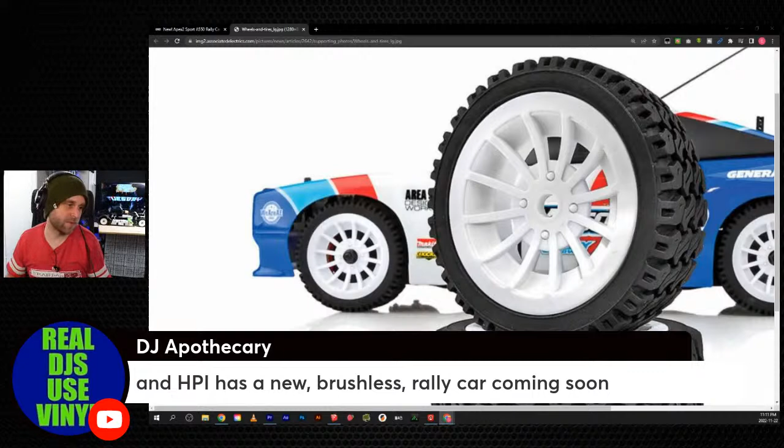And HPI has a new brushless rally car coming soon. Yeah, I should bug them about that, actually, maybe I'll bug them about that. I'm actually kind of waiting to finish this Baja video thing, so until we finish running this, I don't want to bug HPI, but I've got at least some pretty awesome connections there. Maybe I'll ask them if they want to do something again. I don't know, but no worries buddy, we got to help each other out, and you deserve it.

So frig yeah, what happened to the big Porsche build? Yeah Arthur, we were just talking about that. It's in the works, it's a big project, it's an expensive project, and we got to make sure that it benefits the sponsors, that's like a big thing. It's got to benefit the sponsors, and so things have been kind of put on hold a little bit with that project because of that. But that doesn't mean it's dead, it's not dead in the water. We might contact Hemistorm to see if maybe he would want to put his touch on a livery. I don't know, but it's going to be expensive. So that's one thing, Arthur, that's a definite contributing factor to why it's kind of taking so long. It's just that it's not a cheap project, with the amount of time involved that it'll take to make it happen, and also how much content it will produce. It's going to take a long time to build it, but is it going to make more than one episode? So we have to figure that out. Unfortunately, this is not my full-time job.

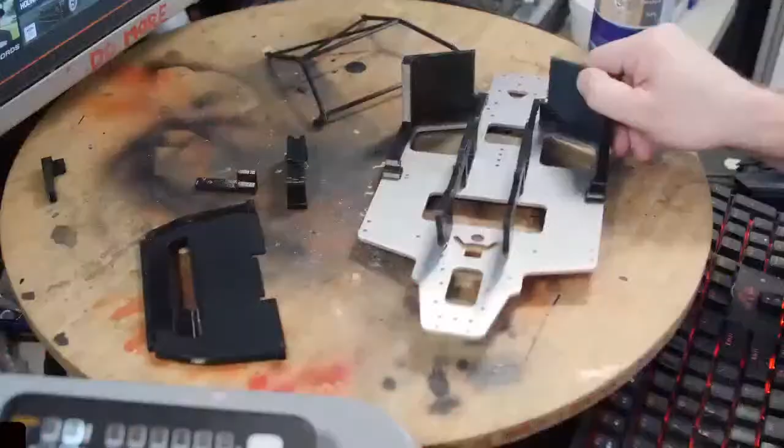I feel like a dummy. All right, we were working on this, and I'm gonna quickly screw in some screws.

Let me know what time it is - what time zone are you guys in? It's 11:19 here. What are we, East Coast? What's that called... Eastern Standard Time, that's where we're at.

Oh wait, I'm not even on camera. Being a dummy, this is not a good camera angle - should have switched it up a bit.

Oh look, I missed it. Oh no, I didn't - nice, we got one.

You know what I realize I'm really not good at? I'm really not good at talking while trying to occupy my brain with mechanical things.

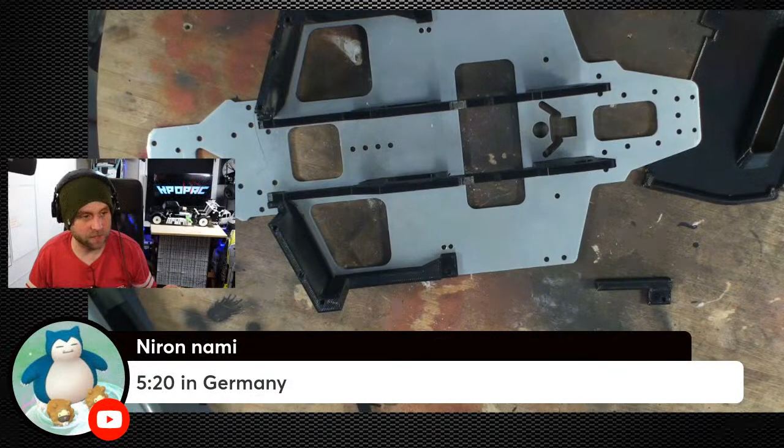9-ish, 8:20 in Portland - oh geez, you guys are lucky, it's so early for you dudes. But Portland, you're right on the West Coast, right? 9-ish, bastards. 5:20 in Germany, like 5 in the morning? No, it has to be PM - yeah, okay, 5:20 PM in Germany, right? No it couldn't be, you're back - 5 a.m. Niron, man, what are you doing up so early, brother? Let's see, your Vancouver here - Vancouver, okay so yeah, 3 hours behind.

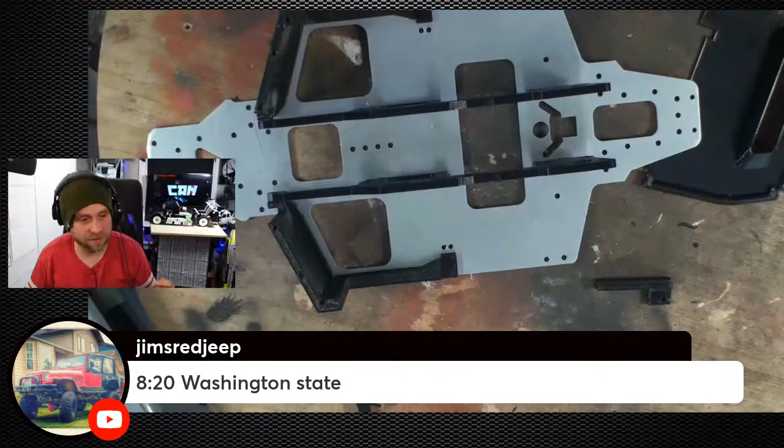More building, all right MK6, I'm on it. Just trying to get Washington State - all right, morning, okay, I'm on it.

Jipper's getting impatient, he wants to see this thing kind of get together. I don't know.

I'm kind of glad I'm just doing this, because if I was to try to put the actual wheels front and back on here, I don't think I could do all these things at once. I don't think my brain could manage.

Oh right, backwards - all right, that's cool. It does look pretty cool, check it out.

So that's what that kind of looks like. The reason the firewall doesn't go all the way to the ground is because there's a battery that slides in there. It's the only way to kind of hide the battery from getting in the way of all the scaleness. So I wonder how this thing's going to perform based on the weight of all the scale performance bits.

But yeah, that's pretty sweet. Broken wrist - dude, how'd you break your wrist?

Colorado, yeah I might go to Colorado, Scott, I'm gonna see what happens. But it would be awesome to go visit the Scale Science boys at some point next year. If that happens, that's gonna end up being mountain bike time too - so probably, if I go to Denver, yeah, I'm gonna bring my bike because there's mountains, man. I would definitely rip up the mountain bike, that's for sure.

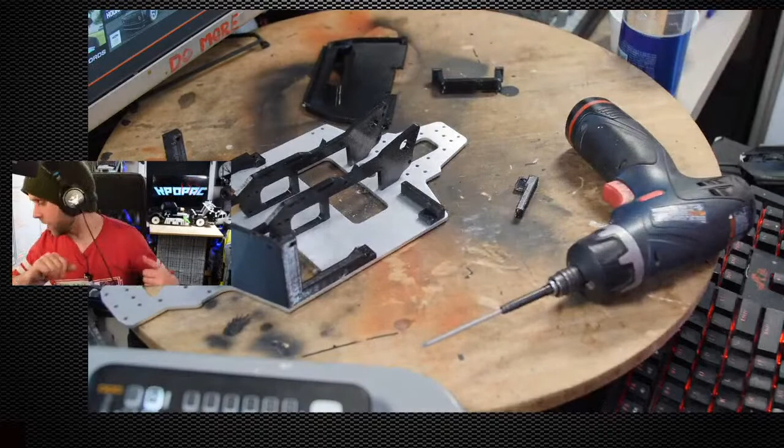Yeah I don't... did I lose everything? Oh boy. Okay, well let's see how far we can get, because I may have lost a couple parts. What the hell, I probably need longer screws.

So you know what I ended up doing? I went to Alibaba and bought a whole ton of metric bolts. They're not the best screws or whatever - these little MFers, don't look at my face, oh yeah there you go. So those guys come in these bags - hold on, I'm looking for the bag of screws I swore I had right here. Oh here it is, so yeah they come in these bags. So here you can see this is like an M3 - I think this is a 5mm M3.

Yeah, I bought a whole bag and I'm almost out of them. I don't know how I'm out of them. So I'm going to order a whole ton more. Basically I'm going to buy every metric bolt size that I can. I'll spend like $60, but I'll have like 1,000 of them, which sounds like a smart idea to me because I'm using them all the time, every time I'm 3D printing something that needs to screw together.

That's not in focus. None of this is in focus. Oh, it's a bit bright though. All right, leave it like that.

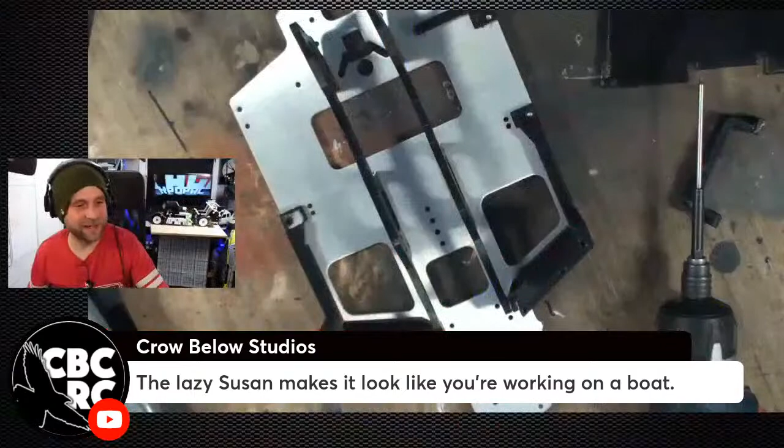I think I got that Fusion combo. Yeah buddy, that's actually really good. That's a good price, Gummy man. I'm so happy you did, dude. If you guys don't know, Hobby Wing Direct has a fusion combo, it's called the Fusion combo. It's what's on my crawler. It's basically a 540 size brushless can motor, and the ESC is inside the can, and it's like 100% waterproof, and it uses some kind of weird FOC technology, and it's extremely quiet. It makes no noise, that motor makes no sound, and that's the coolest thing ever.

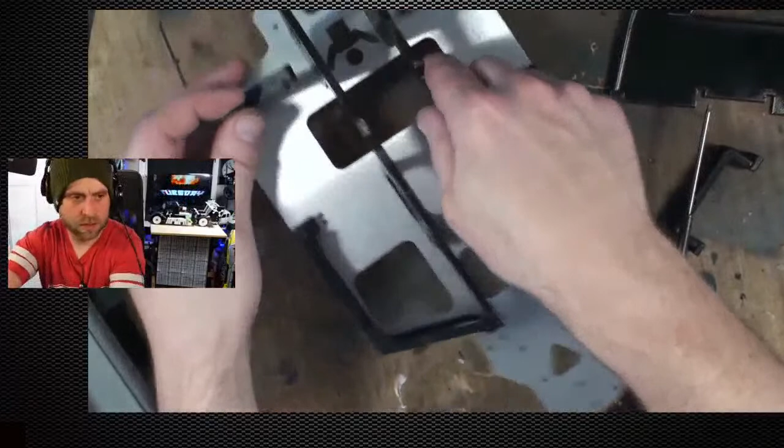Anyway, lazy Susan, I'm totally working on a boat. All right, let's get all this stuff ready to go. Is that bad? Should I just lock it? Because it doesn't help. I guess if I was on this shot it might look cooler, or not, I don't know.

Crow Below is saying he loves the Fusion too. Yeah, it's so good, and it comes with the programming card, which a lot of ESCs and power combos do not. My crawler's slow as heck because my pinion is so freaking small. But this Fusion kit is pretty good, in a good way.

Fusion combo, really great system. You don't even have to worry about mounting an ESC. It's quite good, it's quite good.

I have the Bosch, right? I know dude, I'm telling you, they don't sell these anymore though. So this thing made fifth scale a lot easier. This and DDM's driver bits. This is the best one. The reason this is so good is because of the clutch.

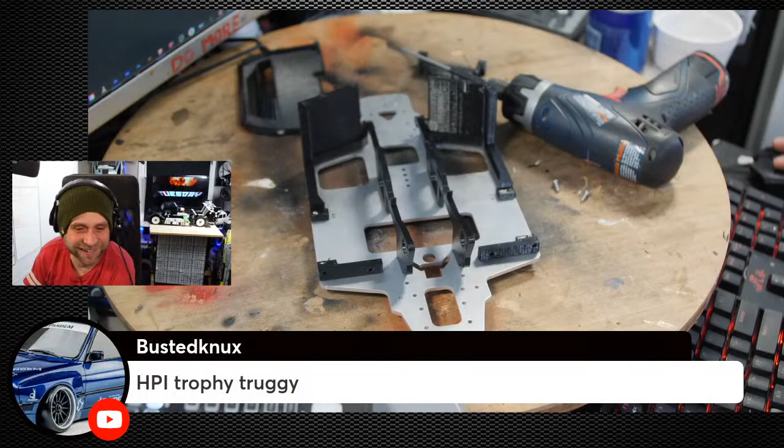Yeah, totally, let's see here. HPI Trophy Truggy, yeah, see, those are sick too. My Nitro RC motorcycle, bro—I don't know if you showed pictures of that one, but that's super cool too.

HPI RS10 with Nova—people were talking about Nova engines. They were telling me to pick one up because you can get lower displacement, higher revving Nitro engines from them, and they're pretty cool.

Nitro Rustler—that came out originally in the early 2000s, maybe late 90s even, I think. I was always drooling over those, and they were like the first ones with easy start too. At the time it was just like, that's kind of cool, you can just turn it on from your remote.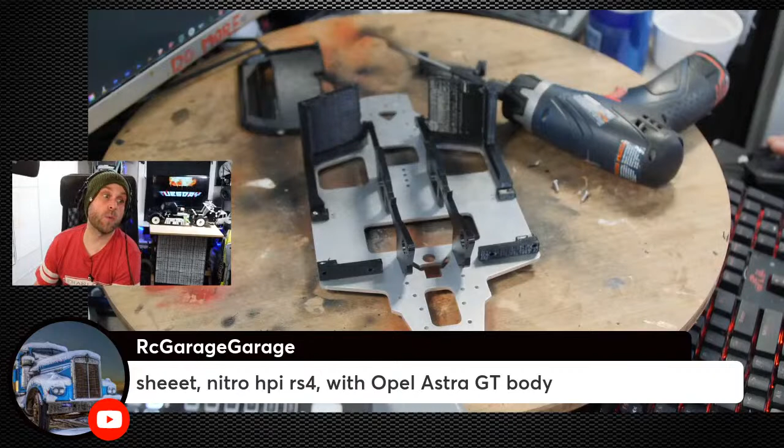HPI RS4, one that I hope they bring back. Did they bring that back? RC Garage, did they bring back the RS4 yet, HPI? I don't know, I have no insider information whatsoever. I hope they do, because that was a really cool platform.

And I would love a Nitro one with a 2-speed MGT8. Oh, if you could get it to start. Doc, man, I know how you feel, man, I know how you feel.

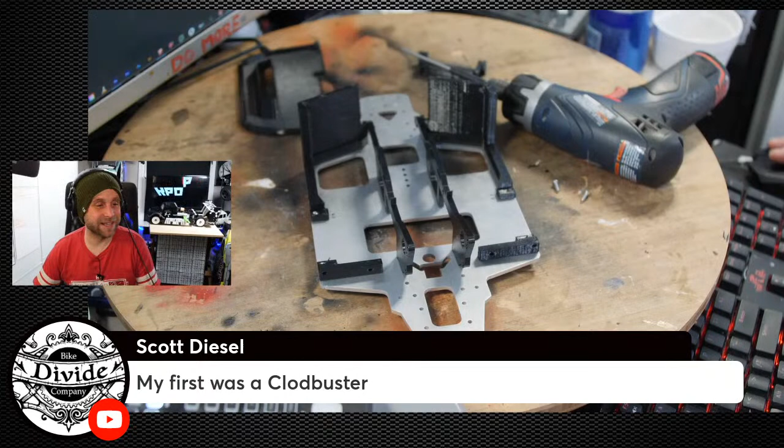Try 5th scale gasoline engines, they'll change your whole mind on combustion engines for RC for sure. Clodbuster is another one. Jado, yeah, dude, all these ones are so sick. Traxxas Stampede was sick too.

And in Nitro, did they come? I guess they did come in Nitro, that's pretty cool, haven't had the joy of Nitro yet. Inferno GT2, yes, with the AMG, yes—that Merc body is so sick. I feel like they just released it.

DJ Apothecary, if you're looking for one, Cardinal Racing might have one in stock. But yeah, man, that's one—I really, really want a Kyosho Inferno GT2 platform.

Especially with like a Mitsu body or this one, the freaking AMG. It's that really wide sedan. You guys know what I'm talking about. It's such a beautiful car.

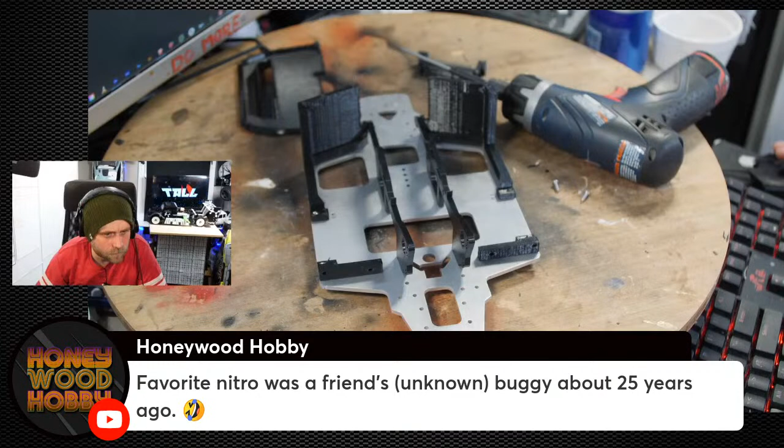I don't know why I like that stuff, because maybe there's just so many moving parts. It's like a freaking watch, a wound watch with rubies for bearings and stuff. But that's cool too, man, I know all about that.

The problem is my parents took me and my brother, because my brother was super into HO scale trains as a kid. So my parents took us to the hobby show in Toronto in like 1995. What a mistake, because that's the first experience I had with Nitro racing. At the time it was large, it was a very big scene.

And maybe they would send me something, I don't know, maybe they wouldn't. They don't owe me anything.

Never owned a Nitro, just about to pull the trigger watching your content. Honeywood, don't do it. Don't do it, man, don't do it. Just don't do it. It's not worth it, it's not worth the pain.

Unless you're really into wanting to learn, unless that's how you work, where it's all about being analytical and figuring out all the little things. You can only change one thing at a time, you got to figure it all out. And then over time you build the experience where you can feel it, you can hear it, you just know what to do.

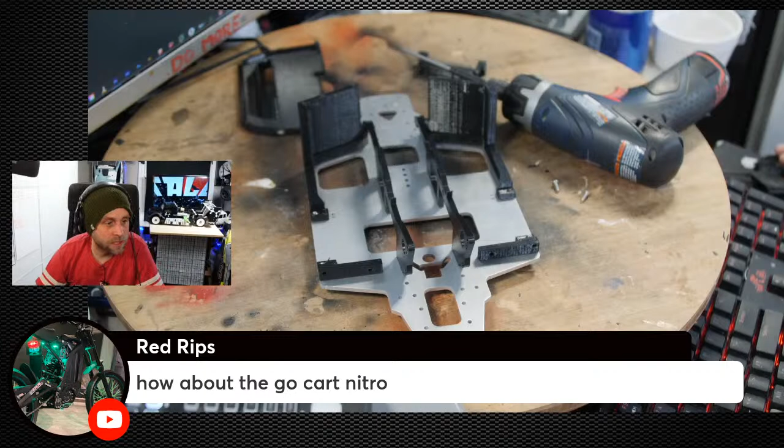How about the go-kart Nitro? I don't have one, but I was actually thinking about making a drift kart, like a go-kart, but 10th scale. It would be like a micro drift chassis that looks like a go-kart, and it would be the same scale as a human, 1/10 scale human. So you could drift with 10th scale cars and a go-kart. That would be kind of cool, actually really cool. That might be something coming, I don't know, I got a bug.

I almost bought 2 of those monster parts because Nash was saying how much he hated Nitros, and I almost pre-ordered 2 of them because they were out of stock, but they said they were coming in. I was like, I'm gonna buy 2 of them, and I didn't. Thank God I didn't, thank God I didn't.

Oh cool man, reunited, that sounds awesome. Rebuild 2 strokes, yeah dude. I'm telling you, Honeywood, man, then you know what it's about.

Stick with electric, man. If RC for you is just relaxing, hanging out, throwing down a chair and ripping in your backyard, I don't know, man, I kind of feel like electric is king for that. But if you're into little moving parts and stuff, heck yeah.

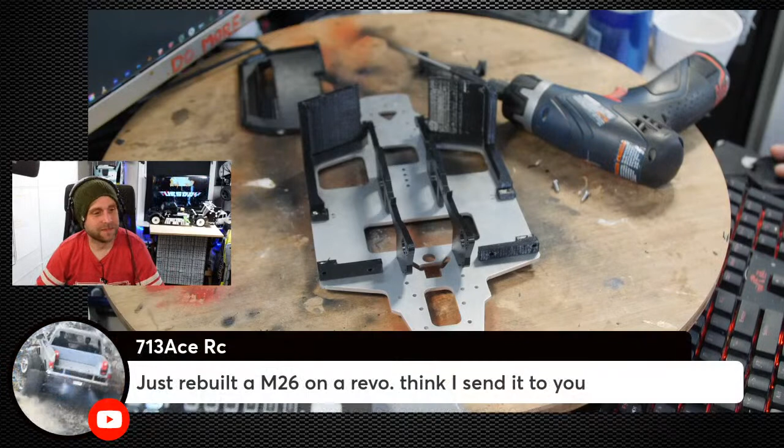RC Garage, it's great. Like, has anybody, that's what I want to know, can I go run my Nitro, or is the EPA gonna show up with choppers and Black Hawk helicopters and red sniper dots and stuff? Is that what's happening? Just rebuilt an M26 on a Revo.

Oh cool, I think you did, you may have, I don't know. Was that on Insta 713 Ace 529? I don't know, I'm having issues with my Insta sometimes. Maybe I'm just getting popular in the sense that people are messaging me a lot, and then it kind of gets all messy.

DJ Apothecary, thank you, GT2 is the 8th scale. Got you, offer the same AMG? Oh yeah, they do. Yeah, the 8th scale is key though, I'm with you DJ Apothecary, the 8th scale one, GT2. Yes, oh man, anything from Kyosho, man, I'm so into it.

Yeah, I don't know much about it either.

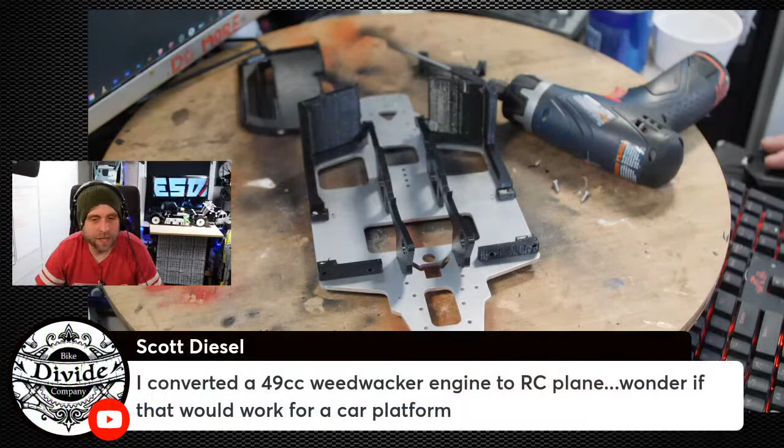The problem with the RC stuff is just how it mounts. They're all Zenoah based. Some of the larger displacement 2-stroke engines have a much bigger distance from the crank to the bottom of the crank housing, so it could be tough to get it into an RC car platform unless that distance is close enough that you can fit it and put a spur gear on it and bolt it to a clutch of some kind.

Oh no, we got some spam. Let's see, block user. Bye, all right, spam bot. No, Nash is sleeping.

He makes some money driving concrete around, so he's got an early morning tomorrow for sure. We got him, might have been like a solid 5 minute delay though for me, not 100% sure. Holy shit, it's 10:40.

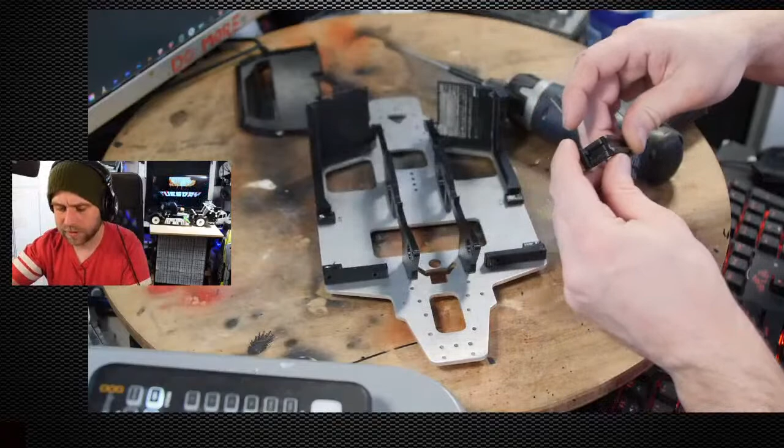Oh, it's Wednesday. It's a drift track day. Maybe I should go and drift, that would actually be a great episode. I haven't done that in a while.

Would you guys be into a K-pop RC drift, another K-pop RC drift episode? We used to do strictly drifting videos where it was just all music.

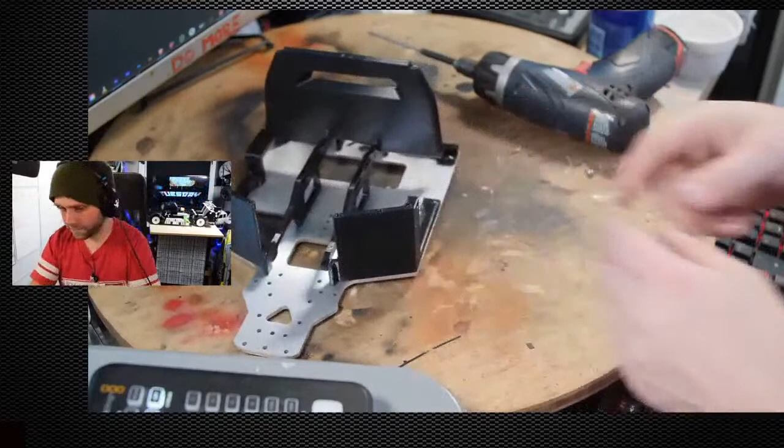Good Lord, I'm excited about this. Unfortunately, when you get me talking it's hard to concentrate, it's that ADHD brain that just can't quite lock onto one thing.

More drift content, Scott Diesel. All right buddy, I will do that, yeah no I will do that for sure. It would be an easy way to get more content for the next couple weeks. If we're not doing Bajas this weekend, that'll give me some content for sure.

I got in from a night crawl, yeah, I just got up for a few more hours trying to thaw. Yeah it's cold, it's gonna warm up a little bit here. I'm hoping there's gonna be some time to run things, the Bajas, this weekend maybe, but it's the girl's birthday so we'll see.

Toy like a toy, Monster Parts, does that make you laugh when Nash said toy like a toy? Oh man, it was a good time, yeah it was fun, yeah it's good times man.

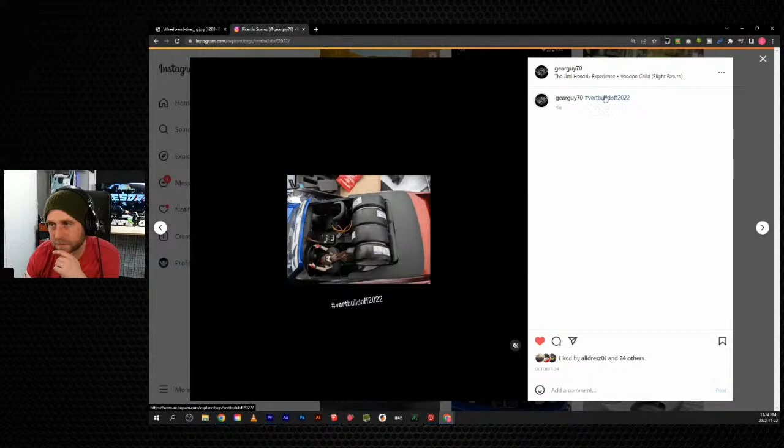There we go, all right. Scale Science right here, Scale Science Miata. Man, that thing looks cool. I like how it's like a slant nose Miata, that's pretty sick too, and the gray color, it's freaking sweet, freaking sweet.

Let's see here, oh wait, maybe there was more of that one. The cage, you can see the cage there too. Oh, crazy, I mean, I don't know. Is it RWB though? I don't know, I don't know if I would call that RWB. Maybe.

Let's see here, Scale Science. Yeah. Some pretty cool stuff, good Lord.